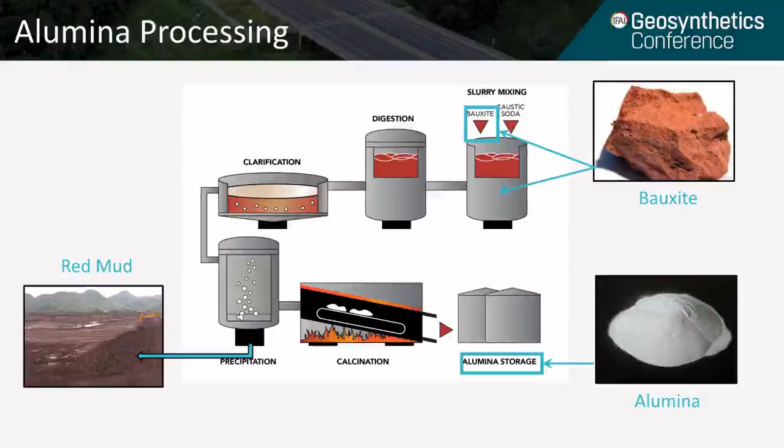In the process, a waste is generated, which is called red mud. The physical features of this material are fine grain and mud-like, and because we use caustic soda, this material has high alkaline characteristics. That means it is very corrosive in the environment.

Aluminum production is worldwide, especially peaking around 2017 based on statistics from that year. We can see China, Australia, and Brazil are the top three countries producing aluminum, and red mud generation is very high for these countries. But red mud disposal is still a worldwide issue, because if we produce red mud, we need to care about managing this material.

Because this material is very corrosive, as I mentioned, its pore water, which is called bauxite liquor, should be appropriately managed. Especially when we design containment facilities, we need to care about the leakage of the bauxite liquor to make sure there's no secondary contamination.

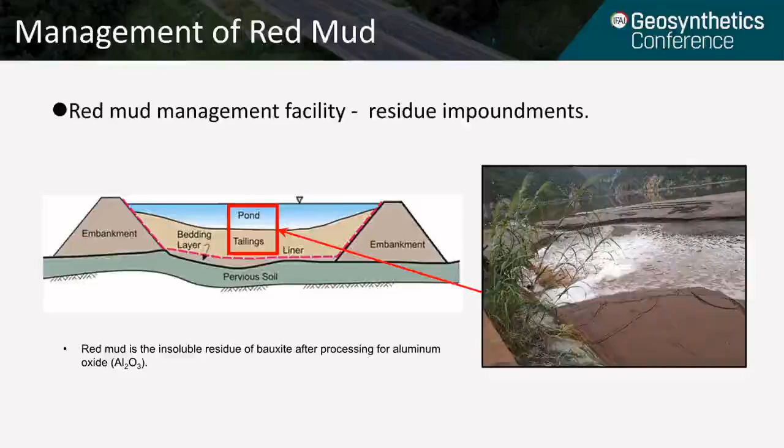Typically red mud is contained in an impoundment or reservoir. Here is a picture I took in China during my visit, showing the pumping in of red mud in slurry form. The solid usually settles to the bottom, and you have a lot of liquid on top and also inside the red mud. A liner system is usually constructed to contain this liquor to avoid any environmental contamination.

Designing this liner can be very critical. Usually the design for this liner is a composite liner system, meaning you have a geomembrane plus either a soil layer or geosynthetics. For the soil layers, it requires the hydraulic conductivity K to be less than 10 to the minus 9 meter per second, and thickness can vary over different countries' specifications.

For example, in China it's usually 1 meter. Sometimes, because the subgrade or soil condition is not that good, it requires a thicker soil liner. Also, typically nowadays many containment facilities are using geosynthetic liners, especially bentonite polymer composite geosynthetic clay liners.

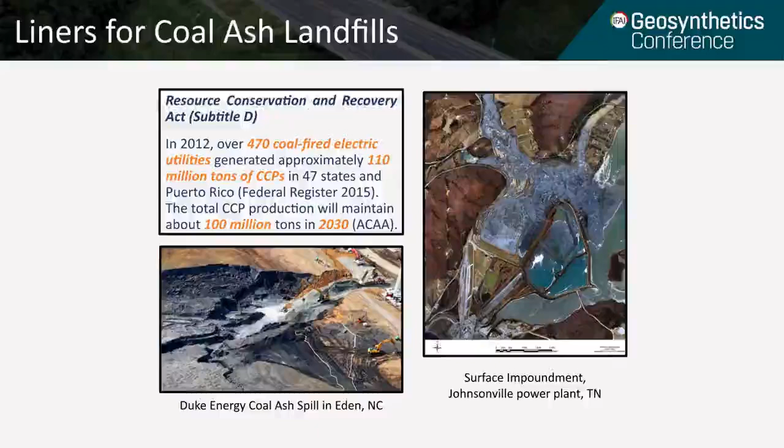Similar situation for the CCP, coal combustion products, which is a very hot topic in the US right now. In 2015, the coal ash rules required newly constructed coal ash impoundments and landfills to use composite liner systems. This liner design follows the RCRA Subtitle D landfill design, using a composite liner with one layer of geomembrane plus 0.6 meters of soil liner, or you can use geosynthetics, that is GCLs, as an alternative liner system.

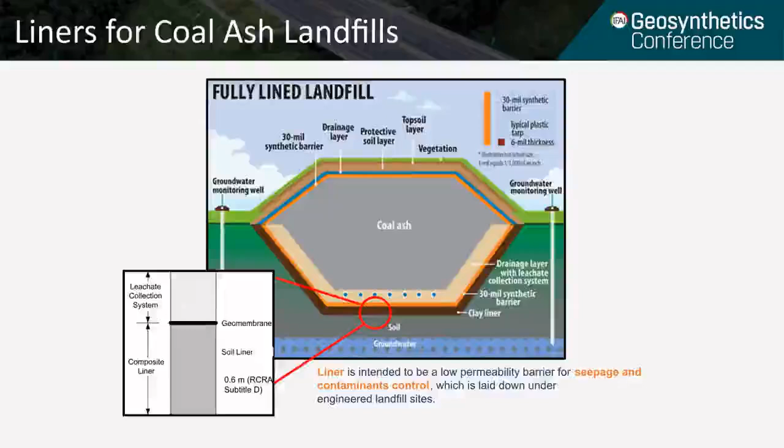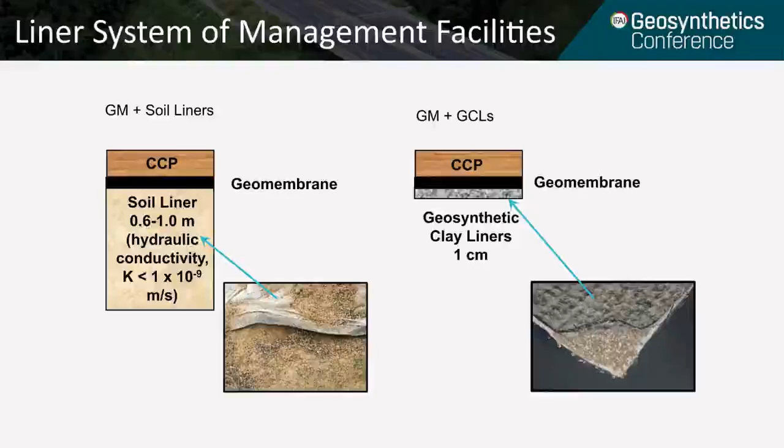Especially nowadays, GCLs have been widely used to contain coal combustion products. The research we conducted previously also compared the performance of sodium bentonite and BPC GCLs.

So this study, because in recent years the products from manufacturers, the BPC, changed, and also the chemistry may change for bauxite liquor and CCP leachate, we are evaluating the compatibility of these BPC GCLs to red mud and CCP leachates.

So in this study, for a better understanding of the compatibility, we have three questions. First is to understand the chemistry of bauxite liquor and CCP leachate. Second is to understand the hydraulic conductivity of the BPC GCLs to bauxite liquor and CCP leachate. Third, after we understand these hydraulic behaviors, we want to know the controlling mechanisms of the hydraulic conductivity of BPC GCLs.

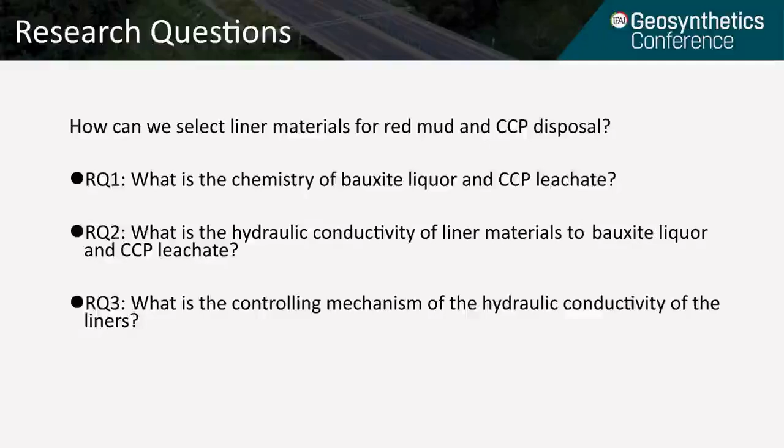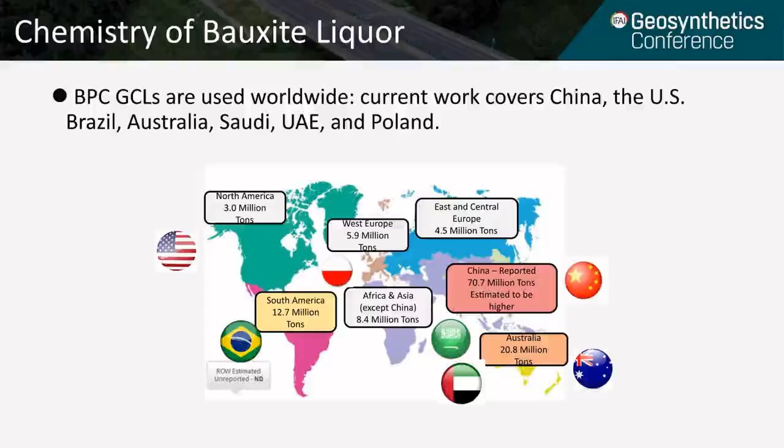Based on our previous experience, we know different sites and different manufacturing processes, different minerals from the original material, can make the leachates vary a lot. So in this study, especially for bauxite liquor, we sampled all across the world. Many countries are included in this study: US, Brazil, Poland, Saudi, UAE, Australia, and China.

We took the samples and shipped them back to the lab and ran the cation and anion concentrations, and also evaluated the pH and electrical conductivity. We found that all these bauxite liquors are high in pH, especially between 12 and 13, and some of them close to 13.

Also, the ionic strength is the measure of the total concentration of ions in the bauxite liquor, so higher means you have more dissolved phases in the liquor. The geometric mean of this ionic strength is around 500 to 600 millimolar, while some of the bauxite liquor can be as strong as 1.5 molar.

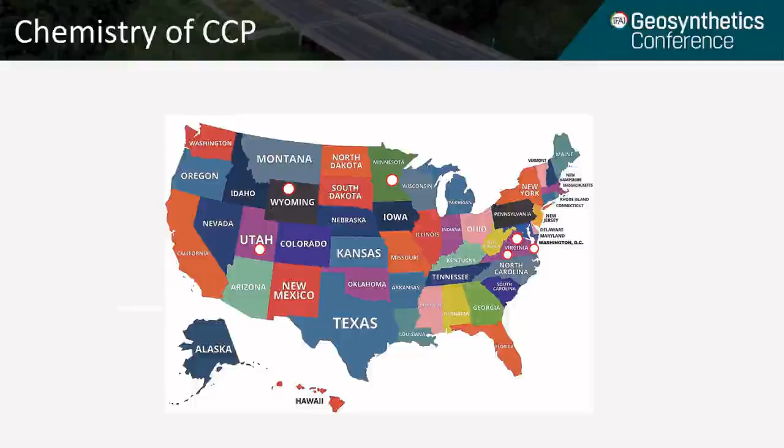We also sampled several power units across the US and took the leachates back to the lab to run analysis, which will help us understand the leachate chemistry of CCPs in the US.

Similar to bauxite liquor, we evaluated the major cations, anions of the CCP leachates, and also pH and electrical conductivity. One thing we find especially interesting for the GCL study is...

Usually we use the relative abundance of monovalent and polyvalent cations, and ionic strength, to relatively compare the chemistry of the leachates. So RMD is a measure of the relative abundance of monovalent cations to divalent cations, so lower means you have a higher tendency for cation exchange.

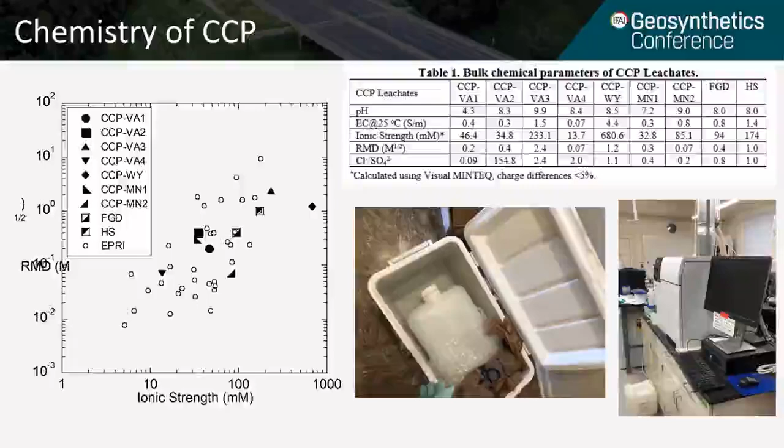In this study, the closed symbols are samples from this study, and open symbols are from a database from the EPRI report that Dr. Benson and I worked on in 2015. We can find that the chemistry of recent years doesn't change too much. The agreement is good, except one of the leachates is higher than the rest, which is around nearly 700 millimolar.

For the BPC GCLs, they're designed to improve the chemical resistivity and reduce the hydraulic conductivity of sodium bentonite. In this study, we evaluated 16 BPC GCLs for bauxite liquors. The number indicates the polymer loadings of these GCLs, measured by the loss on ignition method created by Dr. Scalia in 2014.

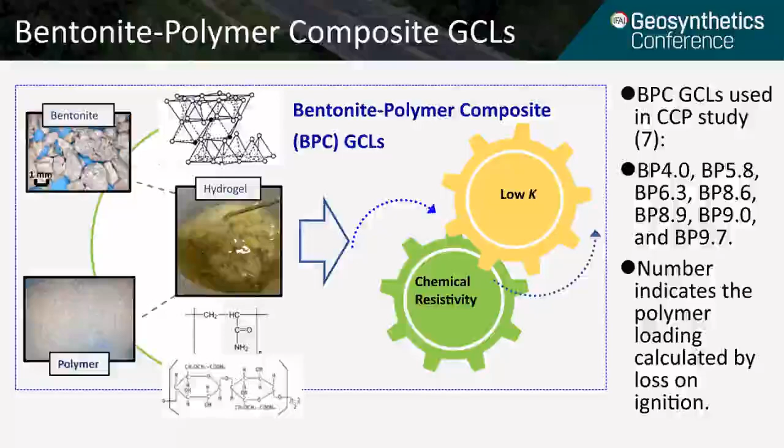Similarly, for the CCP studies, we used 7 BPC GCLs, and the number also indicates the polymer loading. Besides these GCLs, we also tried sodium bentonite for both bauxite liquor and the CCP leachates.

When we start talking about the results, we want to give you some conceptual model for the polymer clogging, which is our hypothesis on the mechanism of the BPC GCLs. As we mentioned, sodium bentonite is chemically sensitive to the leachate, so when you have dilute leachate, you will often see the sodium bentonite granules are swollen, and you have low pore spaces for the flow to occur.

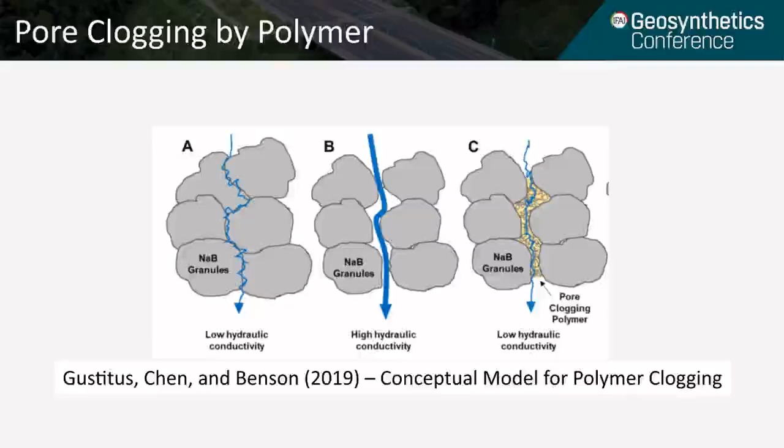When you have high ionic strength or higher divalent cations in the leachate, you will see sodium bentonite granules that have a shrinking structure or granular structure that leaves macropores for flow to occur. The polymer clogging, or BPC GCLs, is designed using polymer to form hydrogels between these pores and create low hydraulic conductivity under high ionic strength leachate, where the sodium bentonite is not swollen as expected.

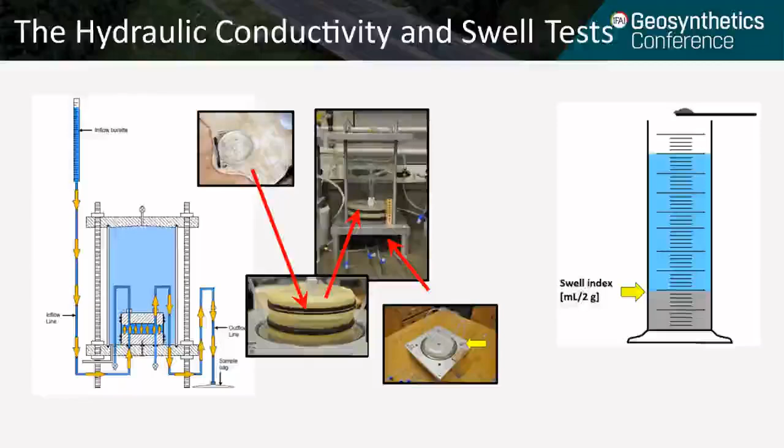In this study, we used the traditional falling head flexible wall permeameters to evaluate the hydraulic conductivity of the BPC GCLs, and also took out the bentonite to run swell index tests. The microstructures were also analyzed by SEM with EDS. Here are the results of the hydraulic conductivity of BPC GCLs to bauxite liquor and CCP leachate.

First, when we used sodium bentonite GCLs, it shows higher hydraulic conductivity under higher ionic strength leachates. When we compare this with BPC GCLs, you can see BPC GCLs usually have lower hydraulic conductivity, lower by 2 to 5 orders of magnitude. Especially for the CCP leachates, the hydraulic conductivities are all lower than 10 to the minus 10 meter per second for all these leachates.

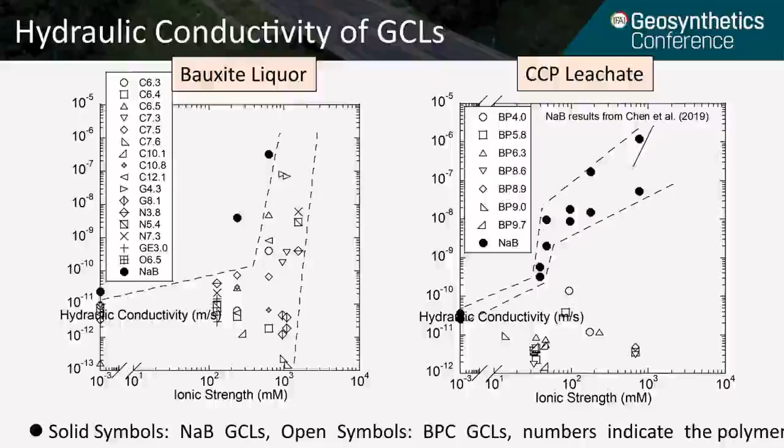Still, there are some increases in hydraulic conductivity at a high ionic strength range for bauxite liquor. I will cover this in the mechanism discussion.

So we want to understand the controlling mechanism of these GCLs. First, we compare the hydraulic conductivity with the swell index. As expected, the hydraulic conductivity is not correlated with swell index. This is consistent with our previous study.

Because the polymer, as we understand, plays a big role in this process, when we compare the hydraulic conductivity with polymer loading, we see that sufficient polymer loading will better maintain the hydraulic conductivity. Especially for the bauxite liquor, if polymer loading is higher than 8.1, you will have hydraulic conductivity generally lower than 3 times 10 to the minus 11.

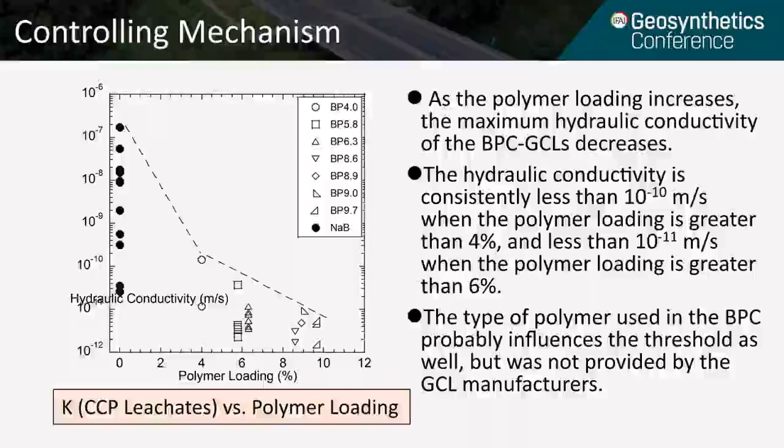Similarly, for the BPCs to CCP leachates, when the polymer loading is 5.8%, you will see the hydraulic conductivity is usually less than 3 times 10 to the minus 11 meter per second. Also, I want to point out that at a similar polymer loading, you will see some differences in hydraulic conductivity between this slide and the previous slide. This is likely due to different permeation liquids or different types of polymer used in the BPCs.

So far we know the polymer is playing a big role in this process, and we want to see the microstructure, how this polymer affects the pore spaces.

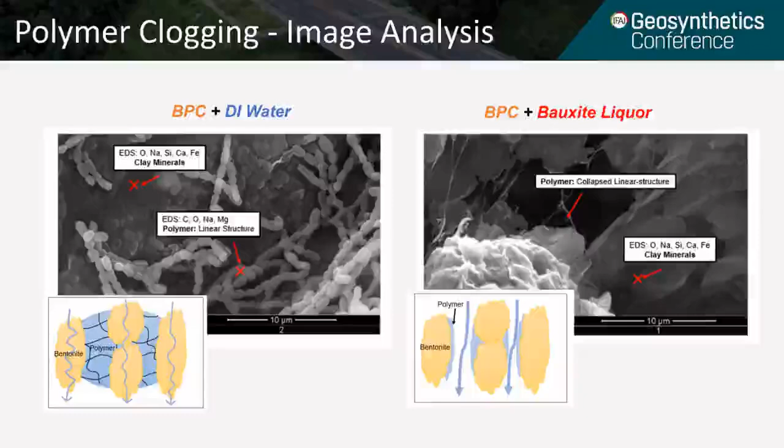Here comes the final part of this presentation. We want to summarize what we learned and make conclusions.

The first conclusion is that the chemistry of the bauxite liquor and the CCP leachate is widely site dependent and needs to be considered in designing the liner system. Especially, we find the bauxite liquor is very highly alkaline, and also some of them may have high ionic strengths.

This leachate chemistry can strongly influence the hydraulic conductivity of sodium bentonite GCLs. But you will often find BPC GCLs can have much lower hydraulic conductivity than sodium bentonite GCLs, and this should be a good alternative for soil liner or sodium bentonite GCLs.

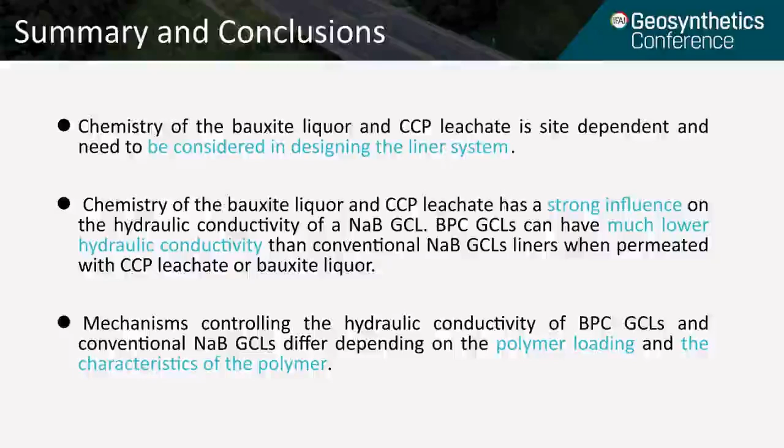The mechanisms controlling hydraulic conductivity for BPC GCLs are different from sodium bentonite GCLs. Usually sodium bentonite GCLs depend quite heavily on the swelling mechanism or swell behavior of the bentonite, while the BPCs highly rely on the polymer, where the polymer loading and characteristics of the polymer can be very important.

So this is the final slide. I want to thank you for your attention and listening to this presentation. At the same time, I want to acknowledge my co-authors, Dr. Benson and Sarah, and especially our sponsors from industry and the Research Institute.

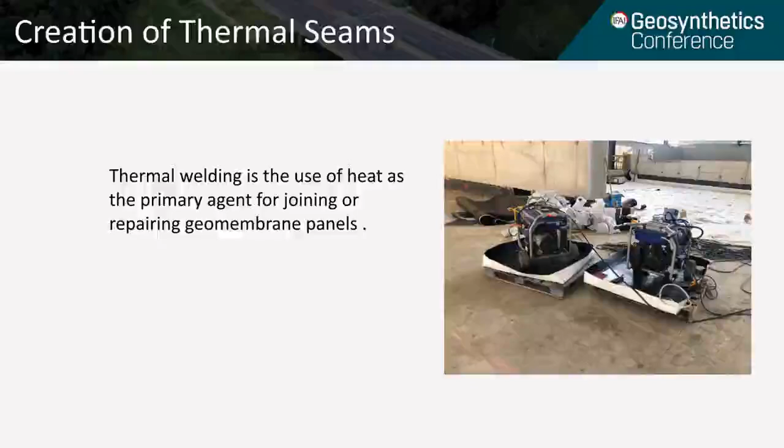We'll begin with an introduction to thermal seaming. As the name implies, heat is the primary source used to join the panels together using the thermal welding method. As you can see in the photo on this slide, in the field, generators are a primary source of the electricity which create the heat.

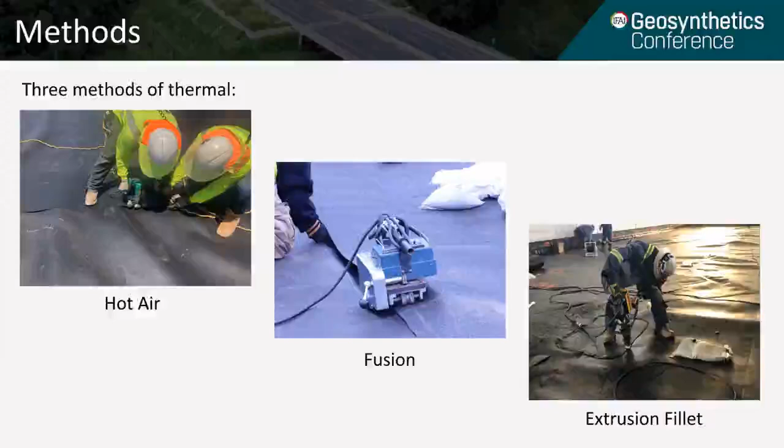There are three commonly used methods of thermal welding: the hot air, pictured on the left, the fusion, pictured in the center, and the extrusion fillet, pictured on the right of this slide.

Thermal welding is used on a variety of materials for welding in the field or in fabrication shops. The materials are broken down into non-reinforced, which have no scrim, and reinforced materials which have a scrim in the center, primarily for the purpose of adding strength. On this slide, you can see examples of the different materials that can be welded using thermal welding methods.

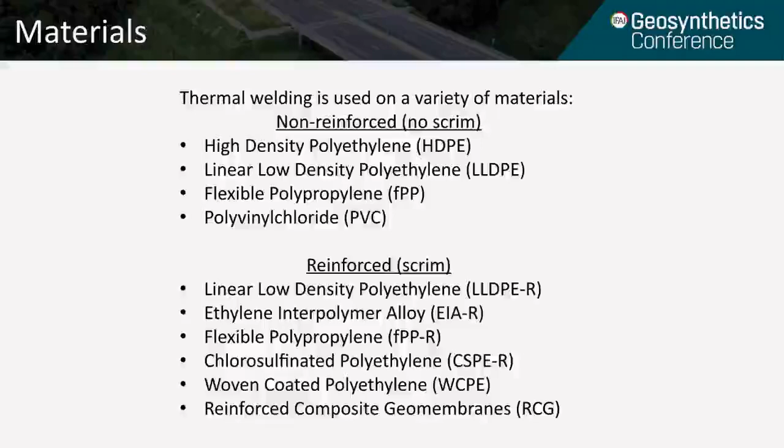The successful combination of heat, speed, and pressure should result in a homogeneous weld that does not damage the geomembrane. As you can see in the diagram, heat, speed, and pressure can be illustrated using a triangle for each of the three components. If you look within the triangle, it shows clearly that the heat, speed, and pressure for PVC, as illustrated by the gold circle, is different than the heat, speed, and pressure required for welding the polyethylene materials HDPE and LLDPE. If you look further within the circle, there's always going to be a sweet spot where you have a better setting that's going to give you your best quality welds.

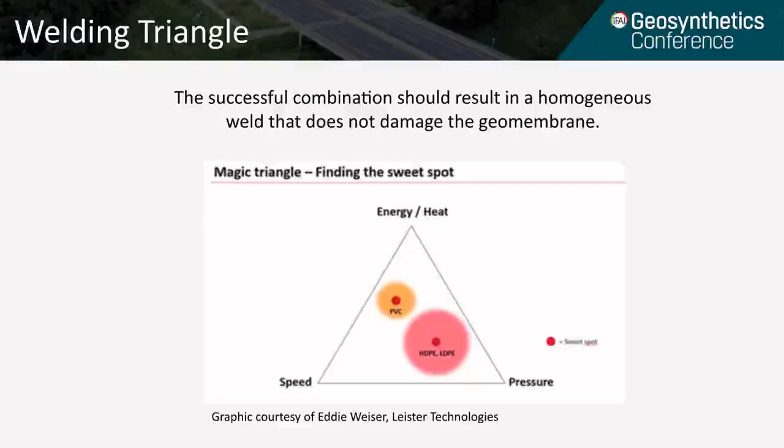Unfortunately, our industry often looks at welding as plug and play, where all you have to do is get your welding machine, put the liner in, let it run, and you're going to get a good quality weld. Well, that's not the case. Minor deviances in either heat, speed, or pressure can result in significant geomembrane failures.

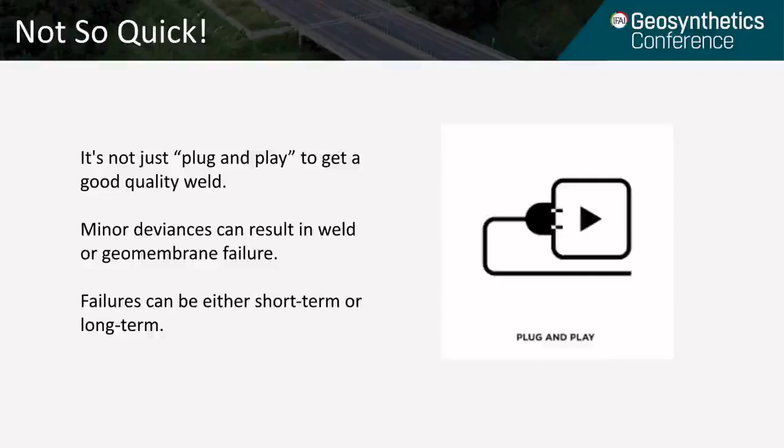Those failures could be short-term, where they'll be obvious during construction, or they could be long-term, where they may degrade over time because of improper welding and fail five to ten years down the road under stress.

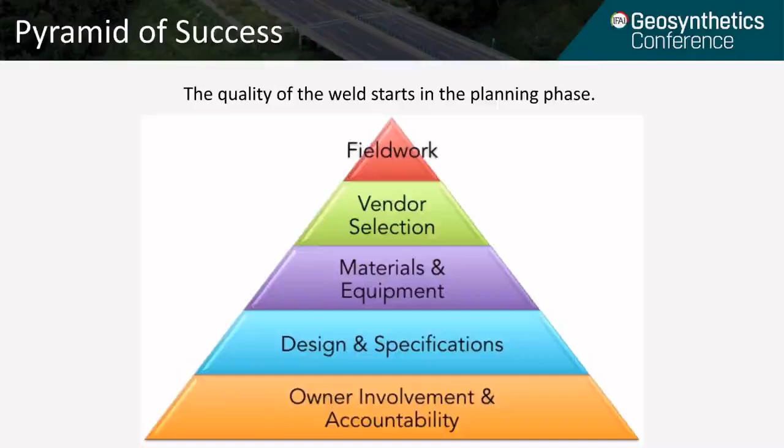It begins with owner involvement and accountability before the project is even designed, picking the right vendors, the people to design the project that actually have a background in geosynthetics, and then getting good specifications, selecting the proper materials, proper equipment. Vendor selection makes a big difference, and then finally the field work aspect. All result in the final end quality of the weld.

Now we're going to look at the heat, speed, and pressure controls for each of the thermal welding methods I listed before. There are two types of hot air thermal methods: the mechanically propelled and the handheld.

This slide deals with the mechanically propelled. In the mechanically propelled, the machine will have an adjustable setting for heat, an adjustable setting for speed, and the pressure, depending on the manufacturer and model, may be adjustable or it may not be adjustable.

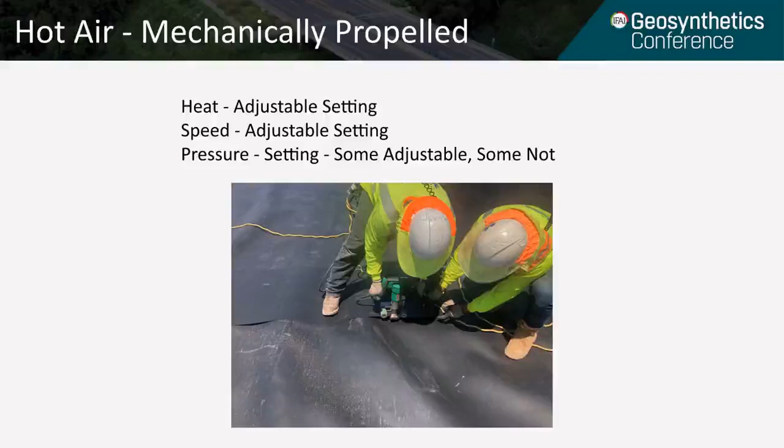The second hot air thermal welding method is handheld devices. On these devices, there's usually going to be an adjustable setting for heat, but that's the only setting there's going to be. As you can see in the photo on the bottom left, if you look to the left of the guy with a glove where his hand is, there's a red knob.

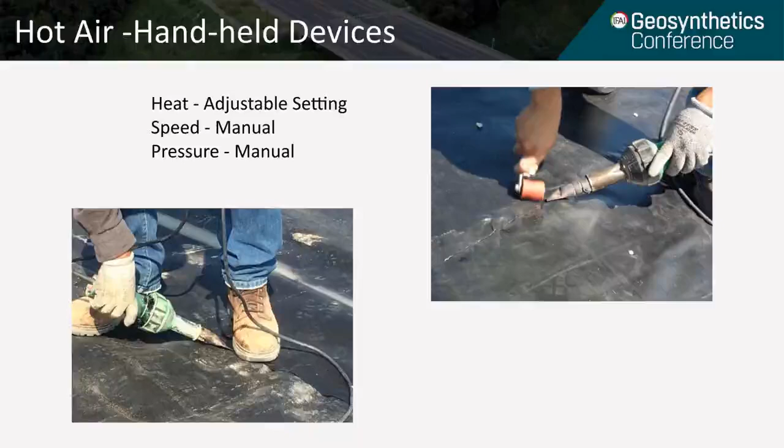That's usually going to be your adjustable heat setting. But you can see the speed and the pressure are going to be how fast the guy moves that nozzle, and the pressure is going to be his foot sealing the geomembrane panels together. In the upper right, same thing, except that they're using a hand roller for the pressure.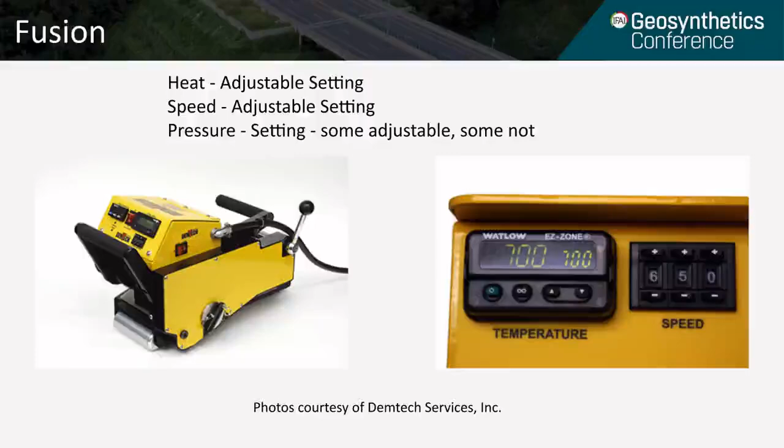For the thermal fusion, you're going to have a heat that has an adjustable setting, as you can see in the picture on the right. The 700 is your setting. The speed also has a setting, and the pressure. Some machines will have a setting that correlates directly to pressure, and some will not have an adjustable pressure.

The extrusion fillet method is a more complicated method, as there's a lot more manual preparation before you even put the actual extrusion weld down itself. Because of that, and the type of weld, it's often considered an inferior weld to fusion, but it must be used where fusion cannot be performed.

Extrusion fillet has two sources of heat. The first one is just a preheat ahead of the nozzle of the gun. The barrel is where the welding rod comes out, and both of those are adjustable settings. In the barrel, you're trying to melt the extrudate rod so that it is the right temperature for blending with the geomembrane. The speed is going to be how fast the operator moves, and the pressure is going to be manual—it's the weight of the gun and whatever pressure the operator is putting on the weld.

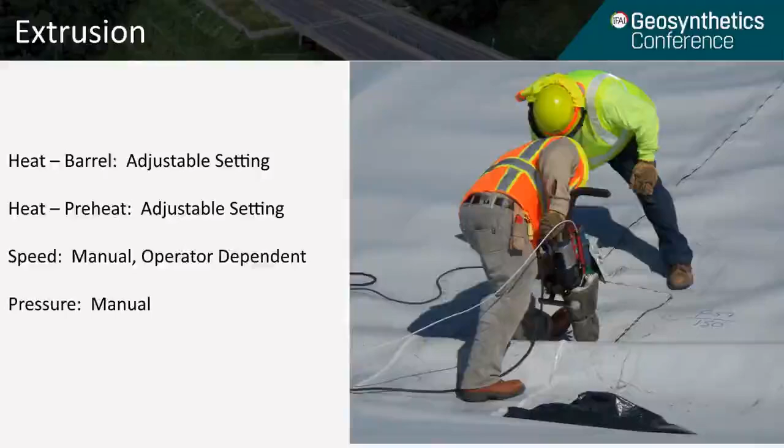So you want to have a firm substrate below it. Welding over a wrinkle is a bad idea because it doesn't have a firm substrate, and it results in an inferior weld. This picture illustrates the preheat I talked about on the previous slide.

It's a close-up picture where you can see the preheat ahead of the barrel, where the welding shoe is. The white is the welding shoe, a Teflon welding shoe. One of the concerns illustrated here is the angle at which the preheat is aimed. If it's too far of an angle, your preheat's not going to be as hot, and it's not going to warm the geomembrane up properly. That's especially true in cold weather.

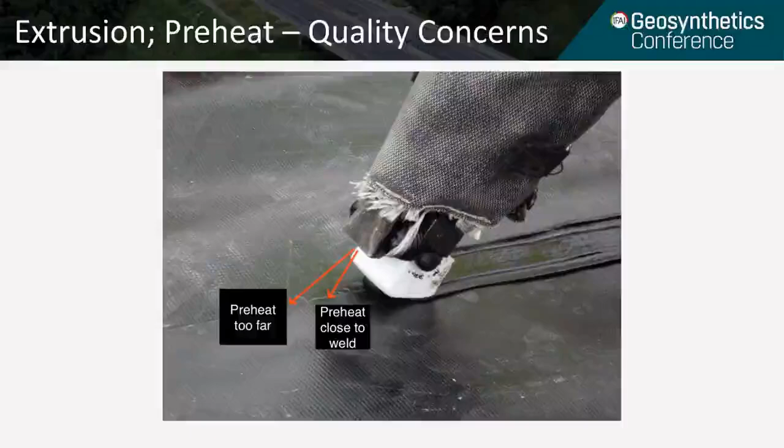This slide shows a summary of the different welding methods we discussed and how the temperature, speed, and pressure are adjusted for each of those welding methods.

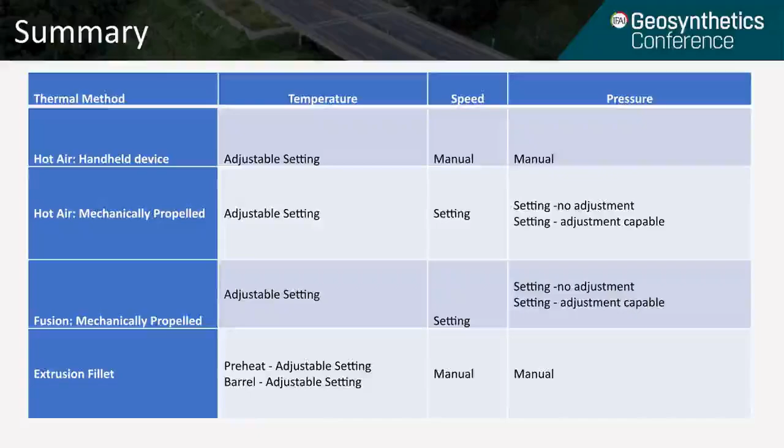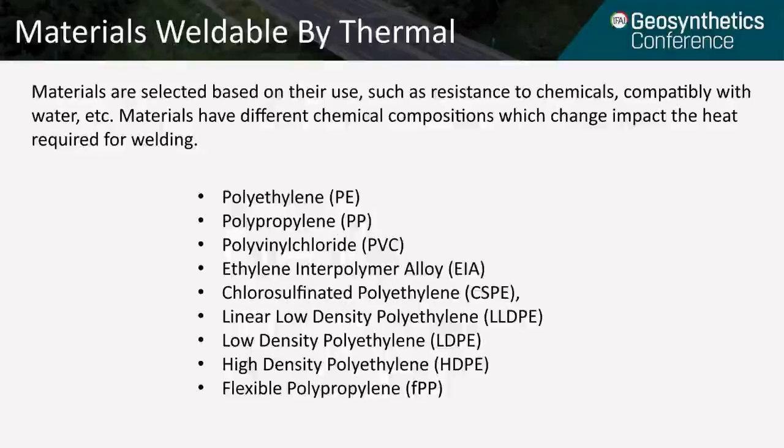In this section, we're going to look at how material type can impact weld quality. Designers are going to choose the material used on a project based on resistance to chemicals, compatibility with water, resistance to stress, reinforcement, etc. These materials will have different chemical compositions, which ultimately change the requirements for welding.

This table shows the minimum and maximum welding temperature range for different geomembrane formulations. For example, if you look at HDPE in degrees Fahrenheit, its range is 600 to 850 degrees, whereas the next line, PVC, is 330 to 700 degrees Fahrenheit. It also shows that reinforced materials, designated with a -R, such as PVC-R below it, are welded typically at the same temperatures as the non-reinforced materials.

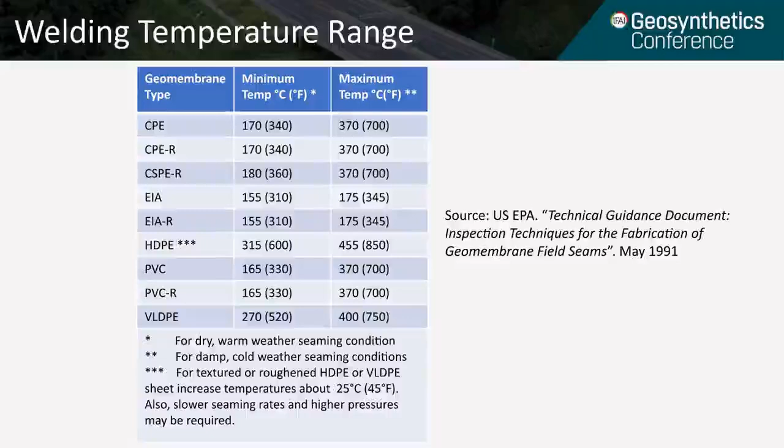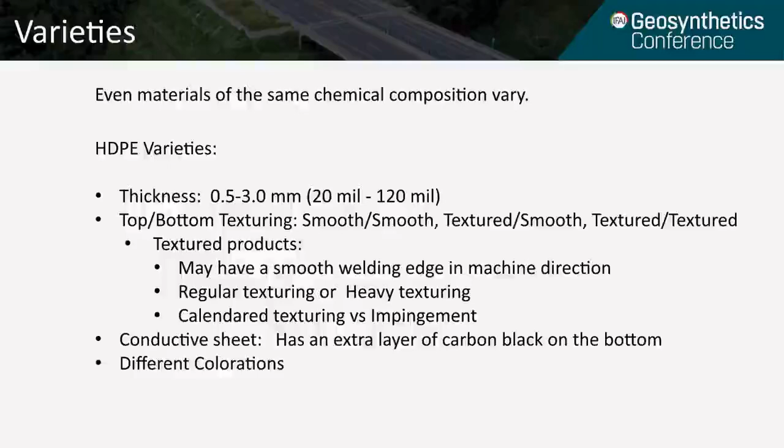Even materials of the same chemical composition vary widely. If you look at HDPE, there's a bunch of varieties. The thickness can range anywhere from 20 to 120 mils. The top and bottom sheets may have a texture—smooth, textured smooth, or textured—with differences in the texturing. There's a smooth welding edge in the machine direction, heavy or regular texturing, calendared texturing versus impingement, which are both manufacturing processes. There's conductive sheet, and there's different colorations. Each of these variances is going to play a role in that welding triangle we talked about earlier.

We talked briefly about reinforced materials a couple slides ago. When welding reinforced materials, it's important that the scrim is not damaged, as a scrim is often there for strength and puncture resistance. If it gets damaged, it will not have that strength.

In summary, each of the differences in material properties will somehow impact the welding window and the proper heat, speed, and pressure, and they need to be considered during the design and compilation of the technical specifications.

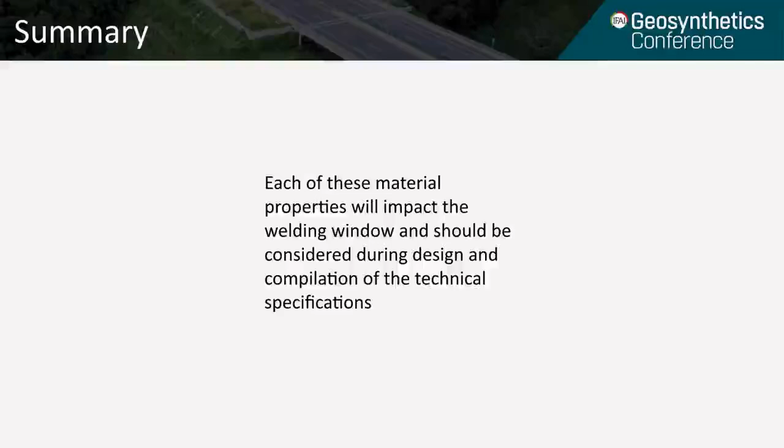The designer needs to account for all of these and understand the limitations, and that's where constructability review by a geosynthetics installer is a good idea. We recommend it, and we've seen it done on several projects, and it's prevented a lot of issues in the field and made them more constructible.

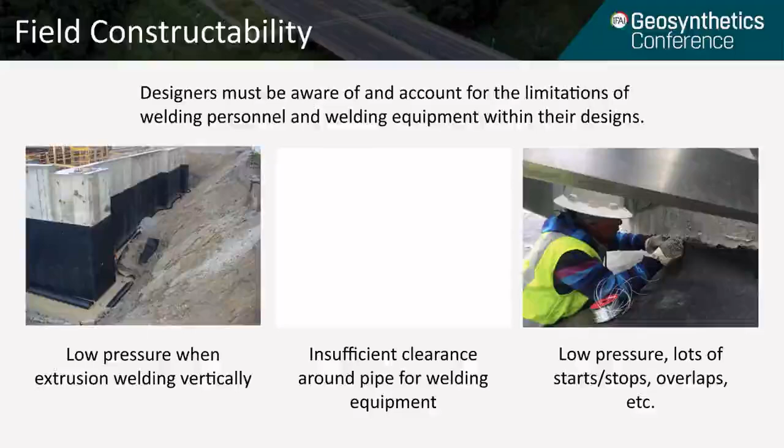These constructability or peer reviews also help in finding the best design methods. For instance, geosynthetics installers are often aware of other products that are out there that designers may not be, especially if they're not designing a lot of geosynthetics projects.

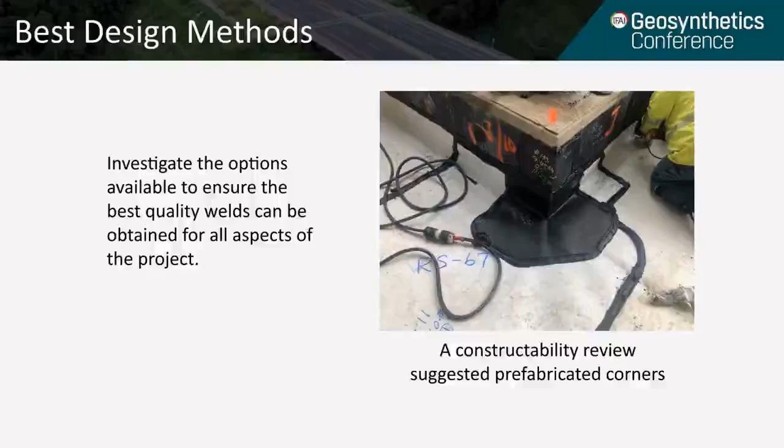If you look at this one, this constructability review suggested prefabricated corners and improved the weld quality significantly. The designers also need to be aware of alternatives to traditional methods, such as the use of a Dremel tool to abrade inside corners where a typical grinding disc will not fit.

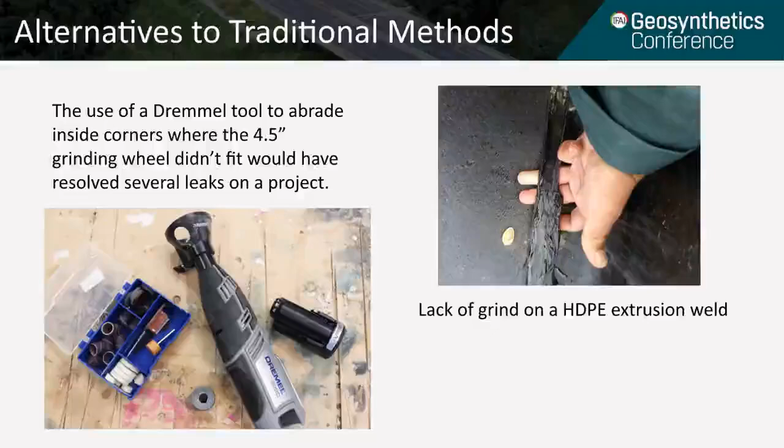The design also needs to consider the reduction of inferior weld types. There's usually going to be a primary seam method and a repair method that are different. Your primary seams are going to be the bulk of your seams. If you look at the PVC method, thermal fusion is going to be your primary method, but the repairs can only be performed by chemical or adhesive, which are very inferior compared to thermal, so you want to minimize the amount of that seaming.

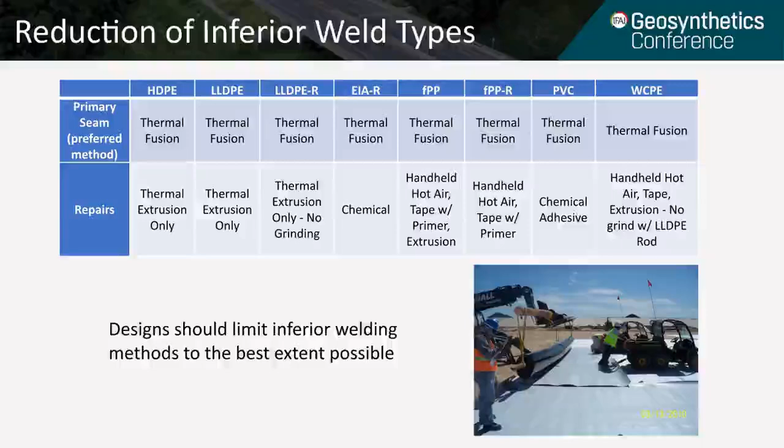Another method to minimize the amount of even the primary seaming, as shown in the picture below, is wider panels. Wider panels reduce the amount of primary seaming, but also there's going to be less repairs, less intersections, so you greatly reduce the amount of inferior welding as well.

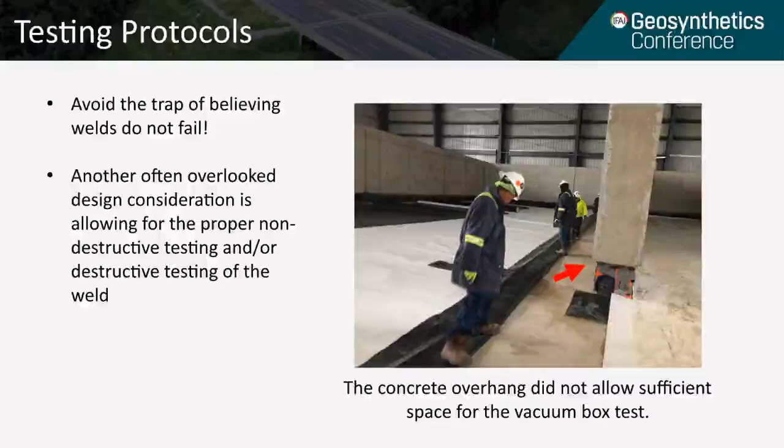As a designer, you also need to avoid falling into the pitfall that welds do not fail. Not only if welds are placed where they cannot be welded, there's always going to be variables on the project such as dust and moisture, things that aren't planned for that can cause welds to fail, which we'll be talking about later. So you need to make sure that in the design the welds can also be testable, both non-destructive and destructive testing, to make sure that the welds are of good quality.

In this section we will look at some of the impacts that technical specifications can have on weld quality. One of the biggest issues we see with technical specifications is that they do not go hand in hand with the design. A lot of engineers cut and paste specifications and they make no sense and cause delays in the field. The other thing that's common is that they do not empower the quality assurance personnel to do their job properly and enforce and remove inferior welds.

In order for the heat to remain constant, you need to have a good generator, and oftentimes we see that the technical specifications do not address adequate power supply. If you use an inferior or improper generator, you're not going to have the proper balance and continuity of heat to get a consistent weld.

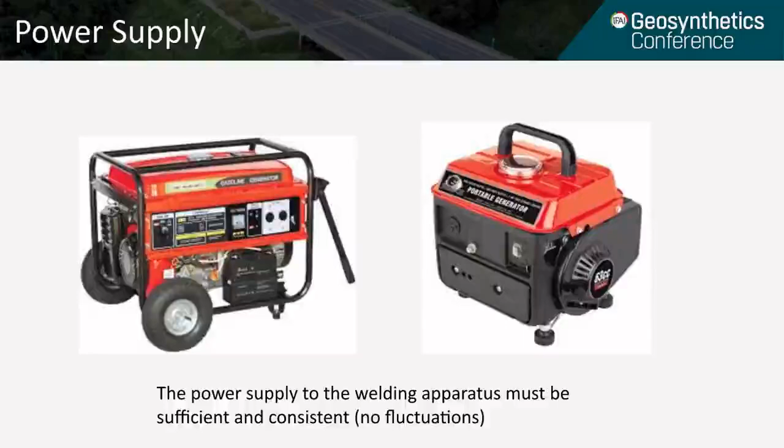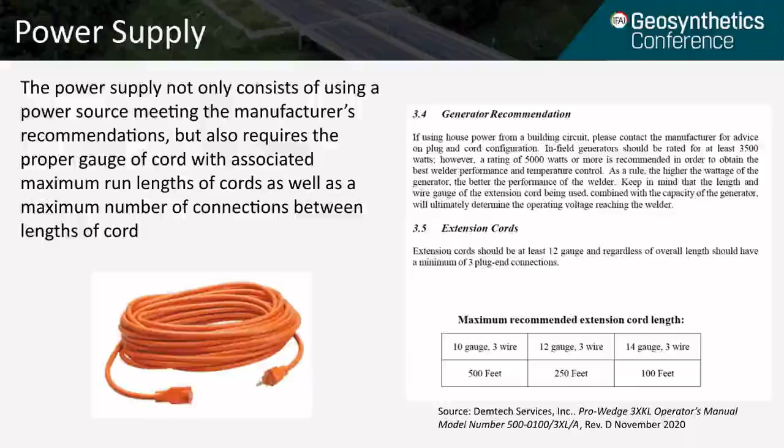Because consistent power supply is critical to the welding process, it's important to know if you're getting that consistency or not.

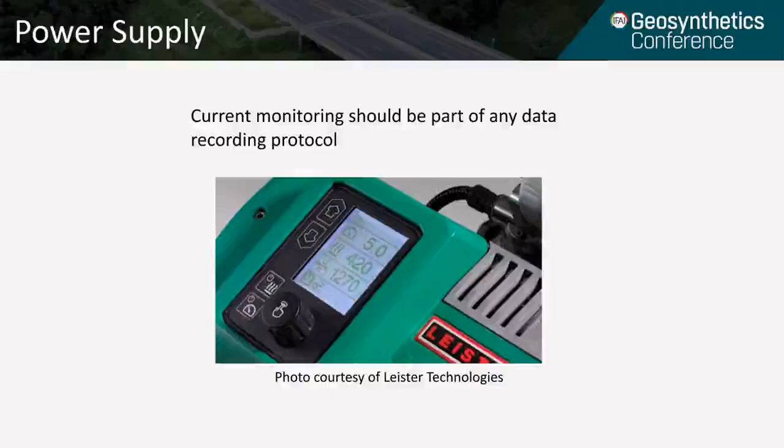Ideally, welding machines would have devices that would allow you to monitor the current arriving at the machine throughout the welding period. Another area we see lagging in technical specifications is dealing with material interface and understanding how that relates to the quality of the weld.

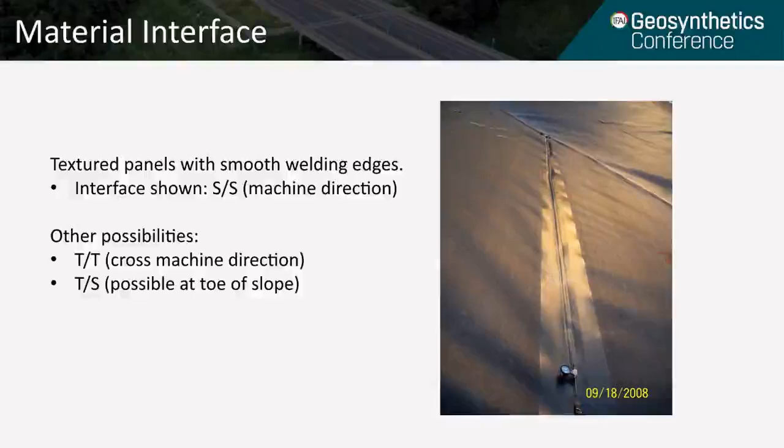As shown in the picture here, there's a smooth welding edge on this textured sheet, and that allows the overlap. The overlap is your interface area, the bottom of the top sheet and the top of the bottom sheet, what those two materials are. In this case, it's smooth and smooth, but it could be textured if you're on a cross machine butt seam, and textured-smooth might be possible at other areas as well. Each of those combinations of interfaces is going to change the welding parameters for that particular interface.

This table is here to show the difference between textured and smooth interfaces. If you look at the bottom of the table, you can see that if you were welding two sheets of 60 mil smooth together, you're roughly going to be at 120 mils that you're welding between the rollers. When you get to the double-sided, you could be close to 200 mils of total thickness. When you're using these different thicknesses, obviously that means different heats required for the weld, different speed, and ultimately different pressure as well.

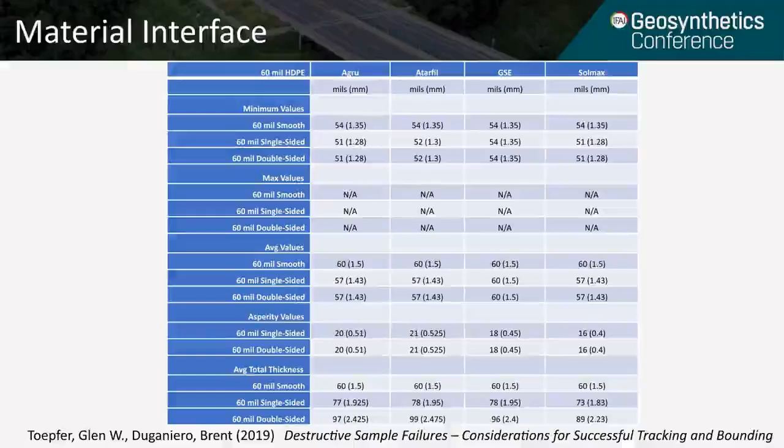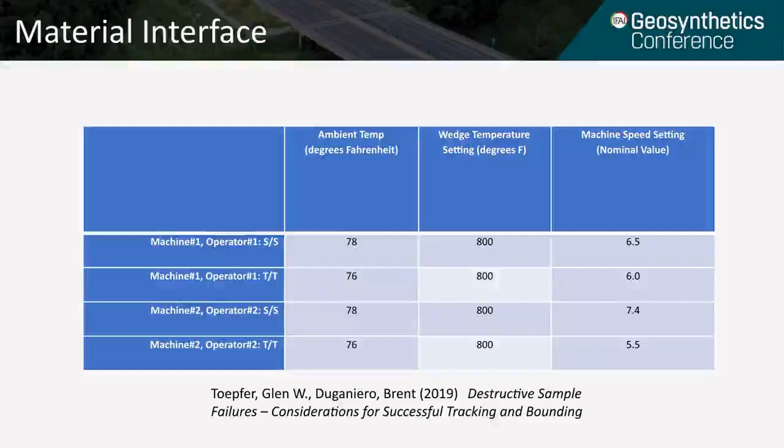The installer needs to be making those adjustments if they're going to get a good weld in the field between materials. This table illustrates that there's different settings used for almost the same ambient temperature between machines and between interfaces, the predominant one being the speed was changed in this case.

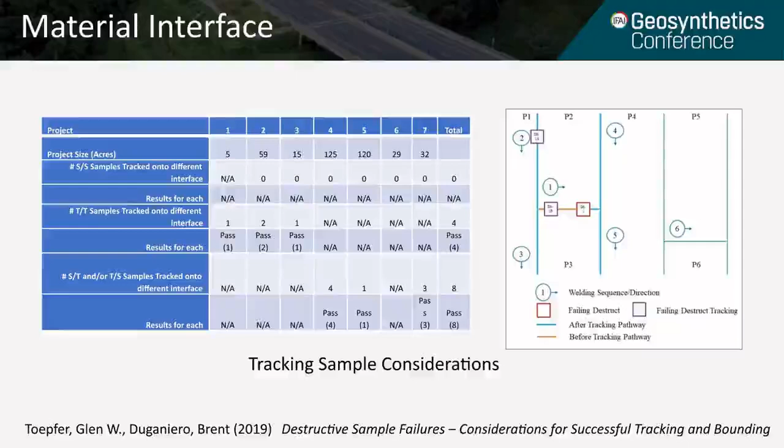In that same study, we also looked at when destructive samples were taken on a textured interface and they were tracked to a smooth interface or another textured interface. In all the cases we looked at, when they were tracked to a smooth interface, they immediately passed. So there needs to be some guidance on how to make sure the other textured seams are not being missed and they're being accounted for somehow.

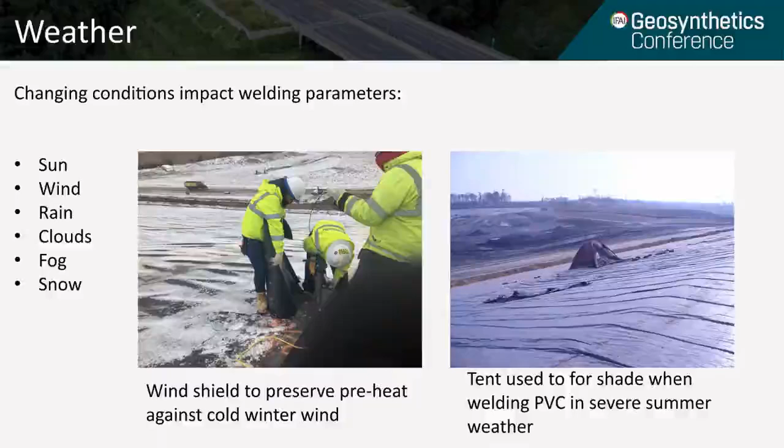Perhaps the most obvious is weather conditions. They're obviously going to have an impact on the welding, the heat, the speed, and the pressure, and they can change several times throughout the day. So it's important for the specifications to give the QA the flexibility to make sure there's other options for making sure the welds are valid.

Trial seams are a great opportunity to evaluate the welds beyond peel and shear. You can look for off-center welds, overheating at tees, make sure the material is welded on top of the proper material. It's a great opportunity, but often it's not used because it's not in the specifications.

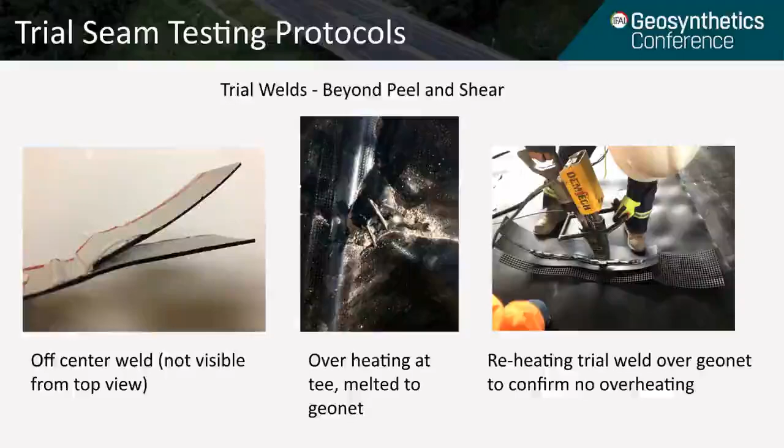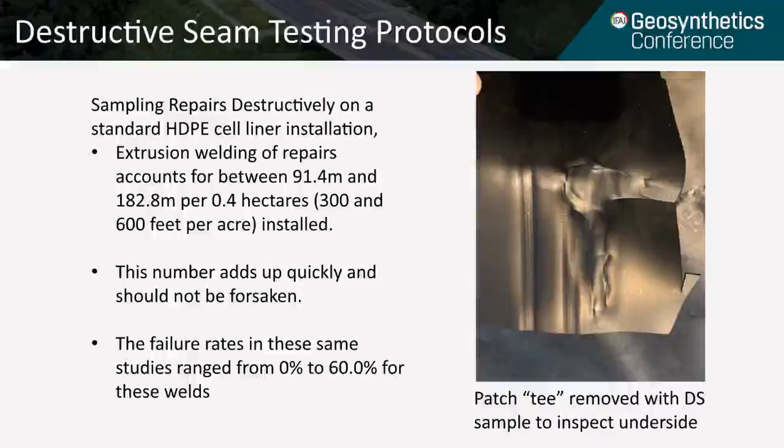End coupons are another way to get a real-time glimpse into the quality of the weld and should be put in the technical specifications. Destructive seam testing protocols should include the testing of repairs. The amount of inferior footage adds up quickly on projects. For example, the Zero Leak Palo Verde project I was involved with would not have been zero leaks if we did not do destructive testing on the extrusion welds.

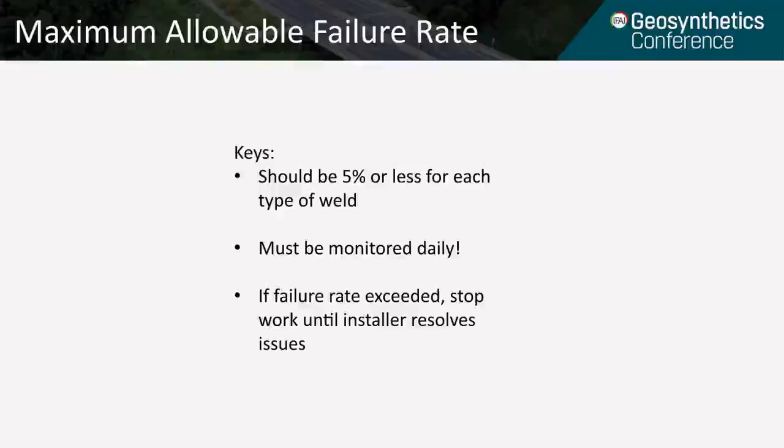The owner should specify a reasonable expectation for maximum failure welds of destructive samples. They should be monitored daily, and if the failure rates are exceeded, the installer should stop and not do any more production welding until they can figure out the source of the problem.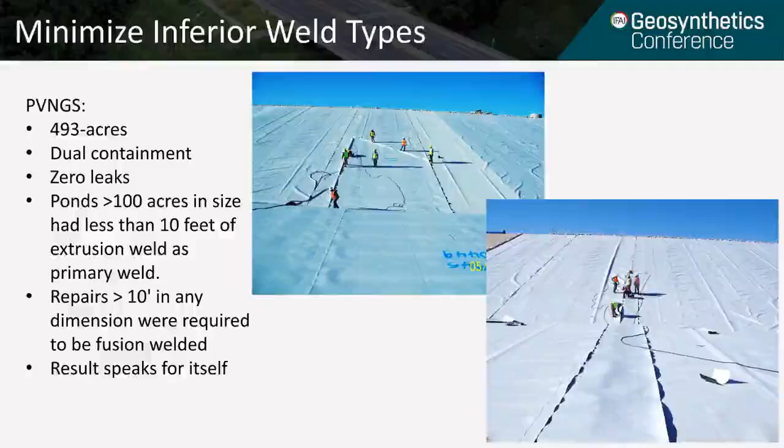Technical specifications should minimize inferior weld types. There's different ways to do that. One is picking a length where that length cannot be exceeded in repair, and if it is, you have to use the primary welding method, for instance extrusion versus fusion. If you do that, the results speak for themselves. You can really minimize the amount of inferior welding that's out there if it's just planned for and addressed.

We're going to look at the impacts the geomembrane installer has on weld quality. Obviously, the installer plays a huge role, especially their welding operators and their equipment and their familiarity with the material. Getting certified installers is a bonus, and checking references on materials and similar projects is essential.

The proposed panel layout can tell you a lot about an installer, especially if they don't have any butt seams showing. This is a good panel layout. They show the butt seams, and that's something that should be reviewed by the engineer to make sure that the amount of inferior seaming is being minimized.

Now we're going to look at how welding equipment impacts the quality of the weld. Wedges get their name from their shape. They are designed to heat up the geomembrane as the top and bottom sheets pass over them for both the fusion and hot air welding methods.

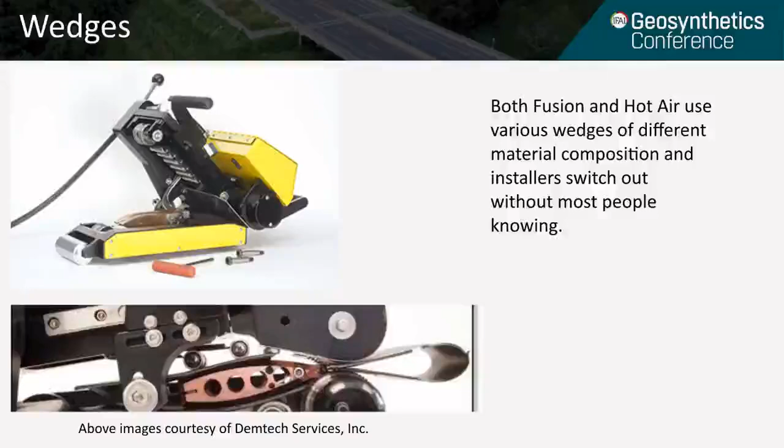They are made of different material compositions. This slide shows some hot air wedges and configurations. As I mentioned, wedges can come in different material compositions such as stainless steel, copper, and porcelain. The use is dependent on the material. Copper is going to give you your most uniform heat transfer, but it's also going to react with PVC, so it's not a good choice for PVC.

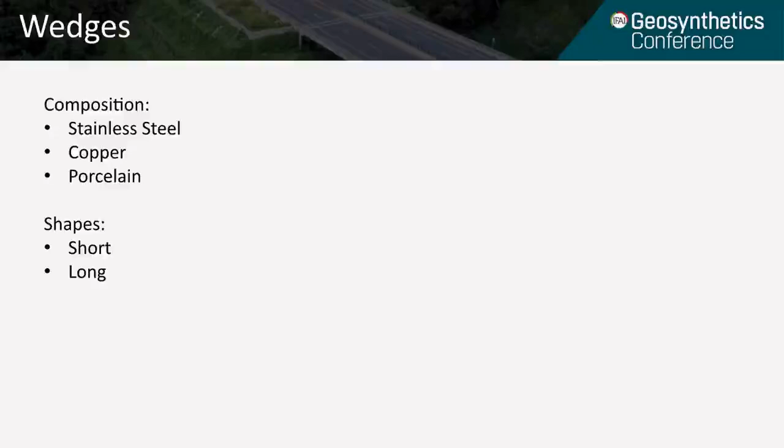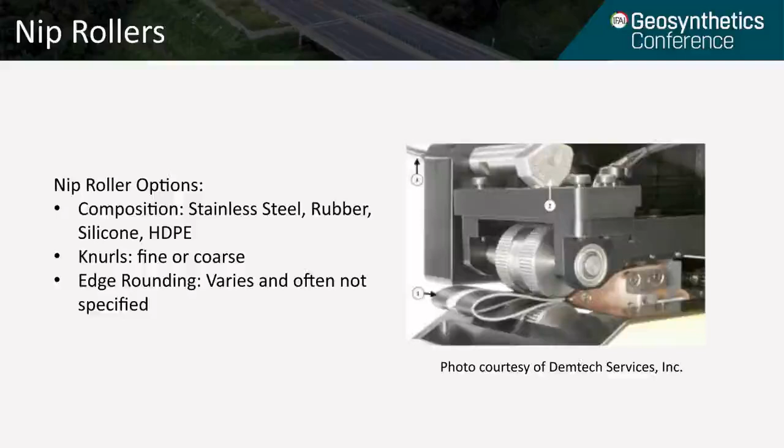Evaluating the impressions left by the nip rollers on a completed seam can be key to identifying problems. The photo on the left shows adequate pressure. The photo in the center shows light pressure, which is going to be an issue. And there's an obvious issue with the photo on the right, where the pressure is cutting through the liner, so it's way too much pressure.

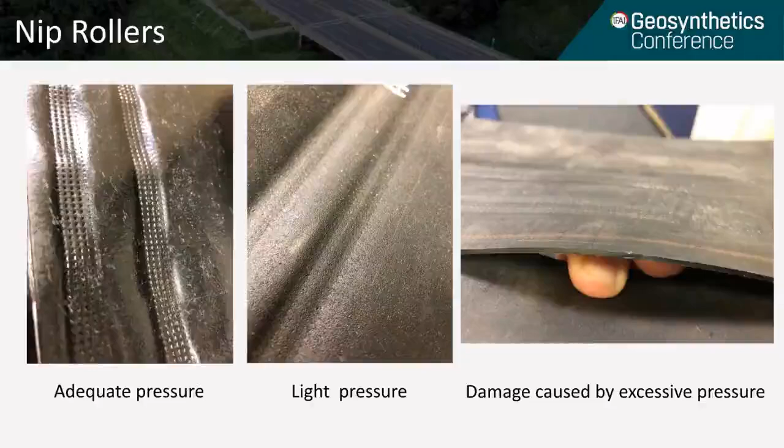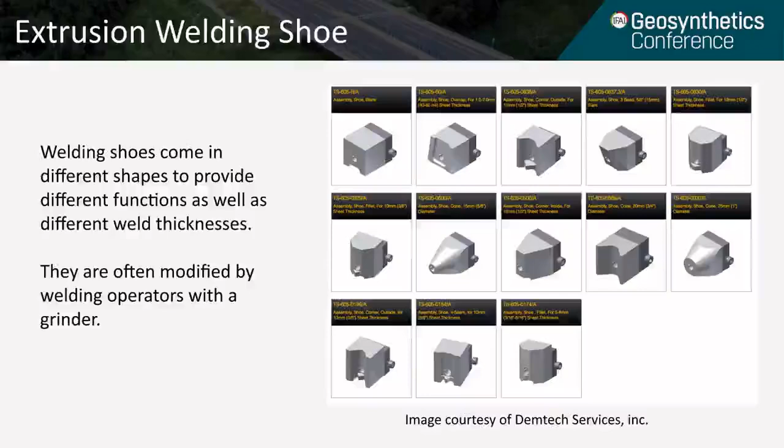The extrusion welding shoe should also be evaluated during the field installation. As shown here, the extrusion welding shoes come in different sizes and shapes for different reasons. One of the big things that happens in the field is they're often modified by operators with a grinder, and that can greatly alter the weld quality.

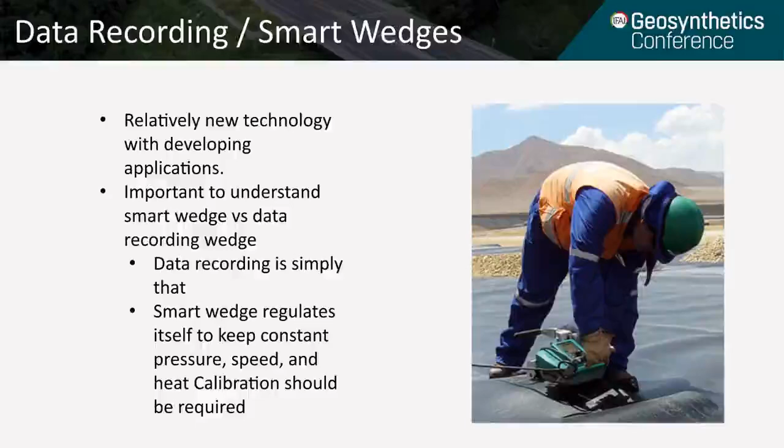Data recording and smart wedges are a new and developing technology. It's important to understand the difference: data recording simply records, whereas a smart wedge has a processor that regulates the machine as it goes along to keep the electric current consistent, as well as its heat, speed, and pressure. Calibration should also be required in order to have a reference.

We'll now look at construction quality assurance and its impacts on weld quality. I believe this quote says it all: 'The first dollar I would spend on a project would be on construction quality assurance,' by Boyd Ramsey of Ramsey Consulting.

There are numerous studies out there that also support Boyd Ramsey's statement about the value of CQA personnel. The CQA personnel are the eyes and ears of the project, and they need to be out there observing and watching what's going on so they can identify issues and stop them. CQA personnel need to be observing everything, and visual assessment cannot be understated.

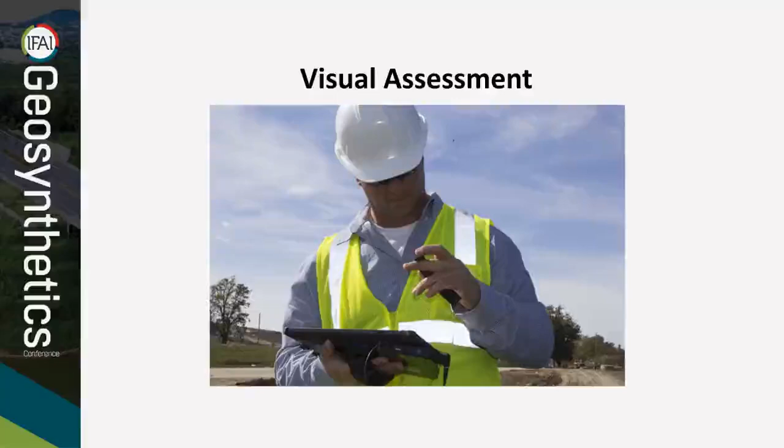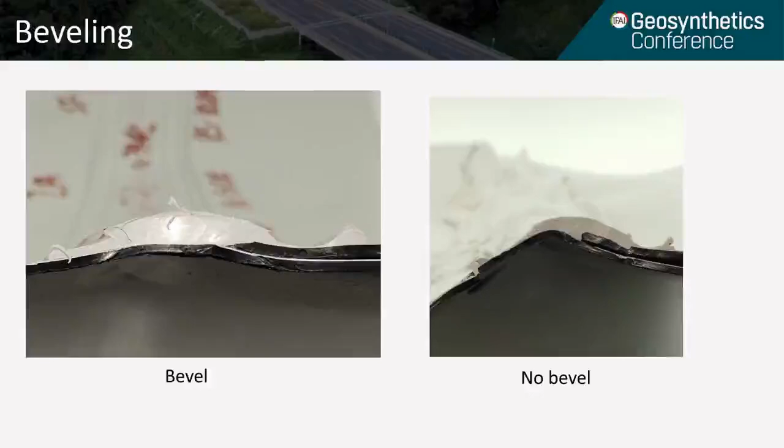In this example, the technician is looking at coupons from trial welds. In the case of trial seams, there's far more to look at than just peel and shear. In this case, beveling was properly performed in the sample on the left and improperly performed in the sample on the right. Even if the sample on the right passed peel and shear, that sample should be rejected and the operator made to redo a new trial seam.

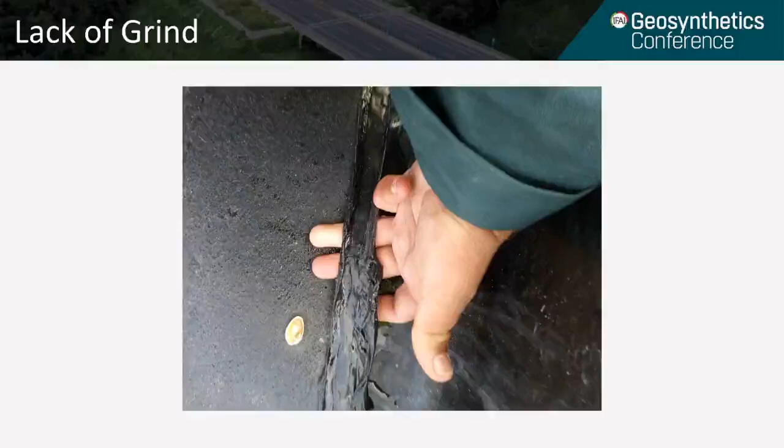It's important to have technicians present when the actual extrusion welding is being performed, because you cannot see conditions like missing grind once it's been welded.

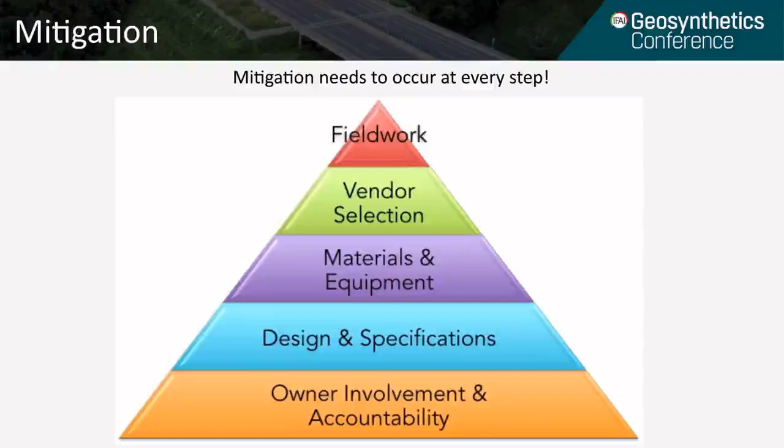So how do we mitigate the issues with heat, speed, and pressure to get good welds? By understanding the welding process and the components of heat, speed, and pressure, mitigation can occur and should occur at every step along the way, from inception through completion of the project.

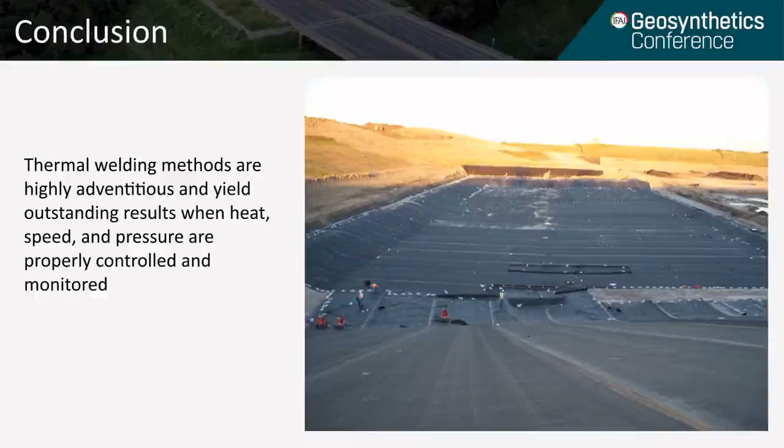Conclusion. Thermal welding methods are highly advantageous and yield outstanding results when heat, speed, and pressure are properly controlled and monitored.